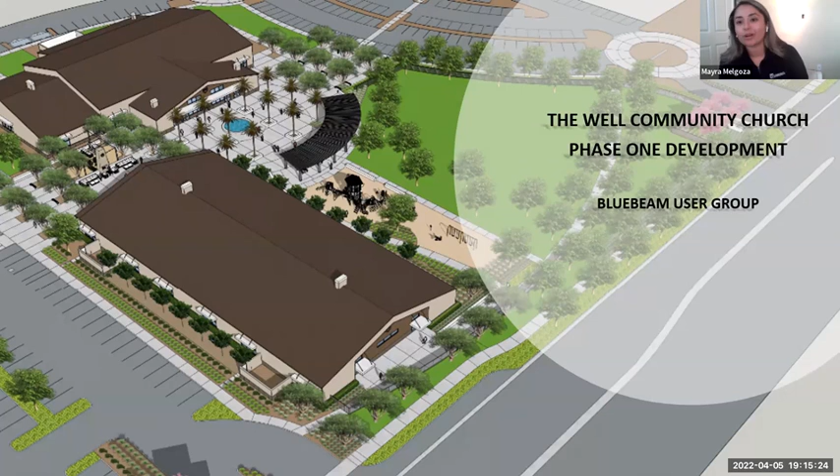So the project I'm currently on as project engineer is the Well Community Church. When I first came onto Quiring, which was probably 2.5, almost 3 years ago, I got hired on as an estimator, and this was actually one of my first projects in pre-construction. I don't know how many of you know what all goes on in pre-construction and how early, and sometimes how long, it can take. But essentially I've been on this job before it broke ground, 1.5 to 2 years, since this was one of my first projects with Quiring at the conceptual stage.

With pre-construction, before any construction drawings get done, you have a schematic conceptual drawing, which consists of usually just one sheet. An architect has an idea, they draw it up on one sheet, and give it to the general contractor to put a full budget together with associated costs. Then as the drawings develop, you have a DD set, design development, what we call 50% drawings. You usually have a few architectural drawings included, some civil, some landscape, and usually at that point the landscape architect draws the renderings.

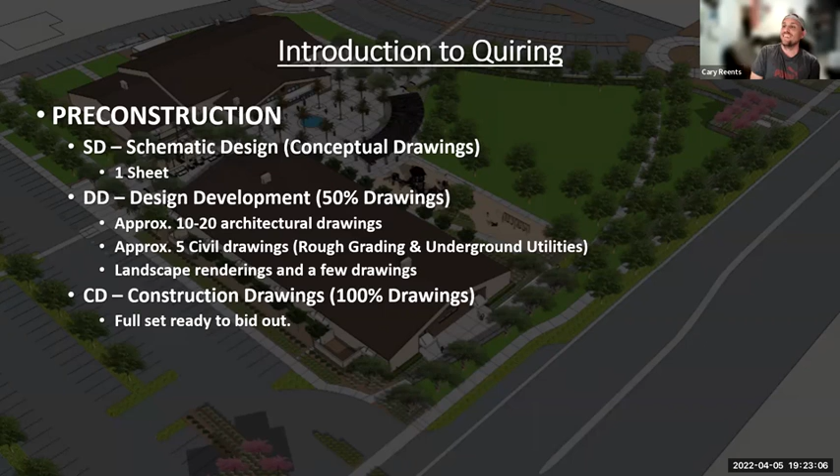Just to give you a brief overview of the project and what it encompasses: this is a 20-acre development of this 50-acre lot. It's off of Clovis and Nees, so if you're local you can drive by if you live in that area. It's two metal buildings, the sanctuary and the classrooms, and the site is pretty large and will feature a play field, a monument tower, volleyball courts, a playground area for the little ones, some shade structures, a fireplace, and fire pits. So this is just a brief overview of the project scope.

And the overlay that you're seeing on the PowerPoint was actually created in Bluebeam. That's probably one of my favorite tools in Bluebeam, the overlay feature. It helps the client see their project over what's currently existing out there.

Mayra, just generally, how did you do that? Did you take a Google Maps sheet and then overlay on top of that?

So what I did was go on Google Earth and get a general area of where your project's going to sit. You take a picture of that Google Earth image and insert it in Bluebeam, then overlay your plan on top. At the end, I was hoping to do a quick demonstration of the overlay feature, not with a photo, but overlaying two plans on top of each other, so students who don't know how to use that feature yet can learn something new today.

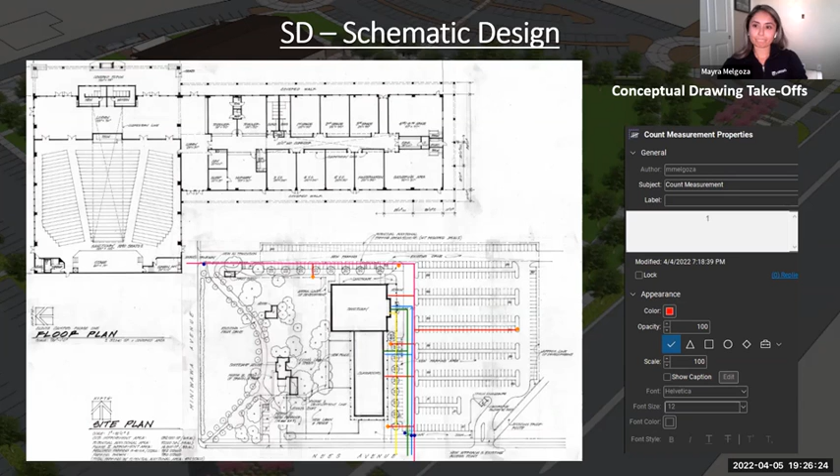And then we get to design development drawings. I noted at the bottom how many sheets are included, and you only have roughly 18 sheets to work off of and develop your estimates from. You have to assume a lot and have coordination meetings with the architects to make sure your assumptions and what you're putting into the estimate are accurate.

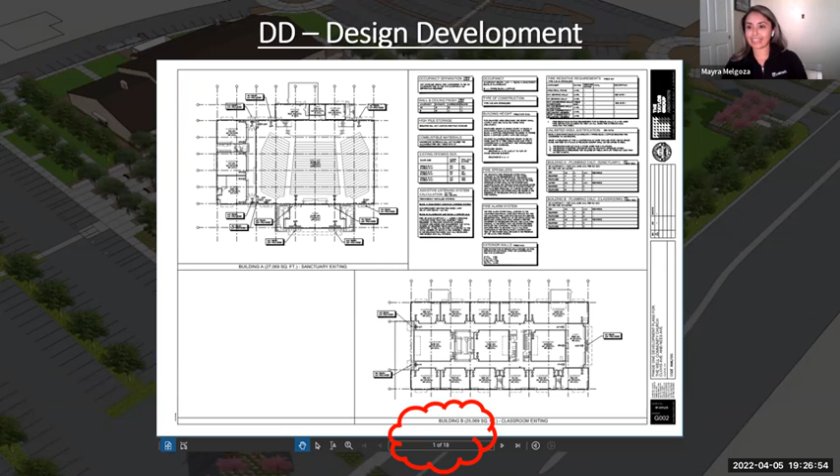Then we have the full set of construction drawings, which is 270 pages, and this would be the set you actually go out to bid with and get subcontractors to provide numbers, the set that goes in for permitting, and that the project team will bid out.

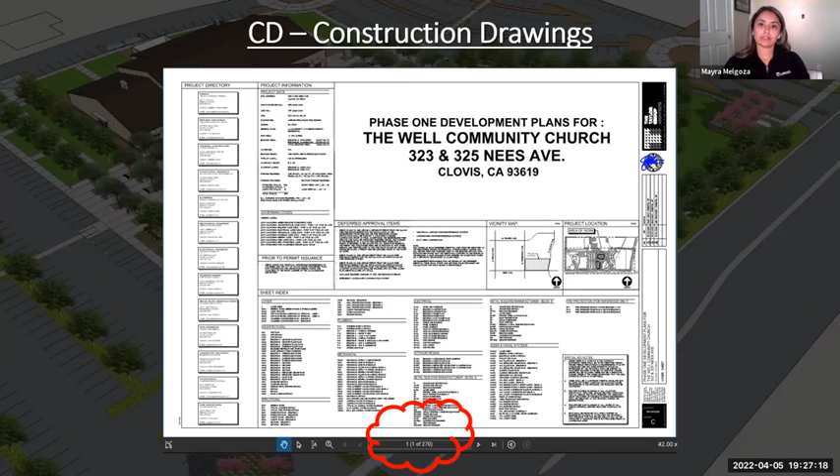I've included some takeoff examples here, both on the site and how I use Bluebeam to develop estimates, doing quick linear footage takeoff of pipe and then plugging it into our estimating software where you input the quantities and associate a unit cost. Same thing with the walls, you can do the interior and exterior framing and associate them with different heights, then plug your takeoff into the estimating software to get the information.

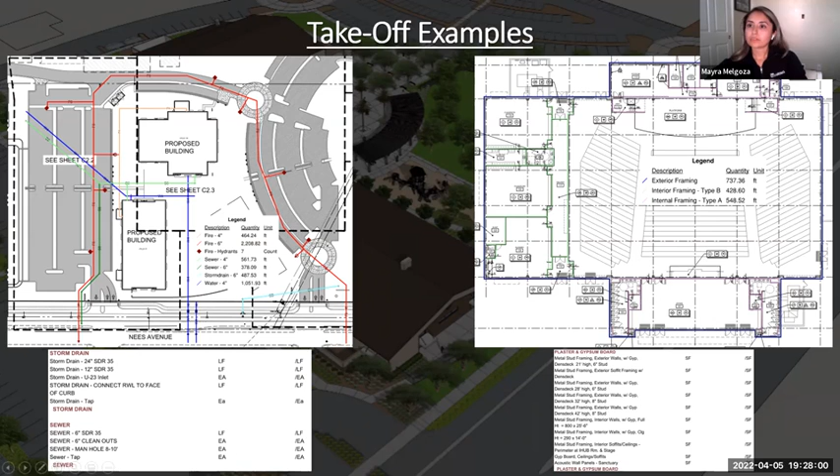As a project engineer, now that I'm out in the field, one of the biggest things I use Bluebeam for is coordination, and this includes drawing overlays. When you're coordinating out in the field, you have multiple trades working in one area and you want to ensure there are no conflicts before you actually go and build that portion of work.

So in this example, I have the civil site utility plan, and on top of that, the building HVAC, building fire sprinkler, and the PG&E drawings. You can see in this mechanical yard kind of where everything is landing, and this allowed us to see there was a conflict down here where our fire riser was right in the middle of an HVAC duct.

It was nice getting this coordinated at the beginning before anything was out and crews were on site, because it saves time on the schedule. These are things that can sometimes get missed during design coordination and pre-con, but if you have these tools and the construction set, doing these quick overlays helps immensely in the field to prevent schedule delays or frustrated subcontractors who have conflicts with another subcontractor's work.

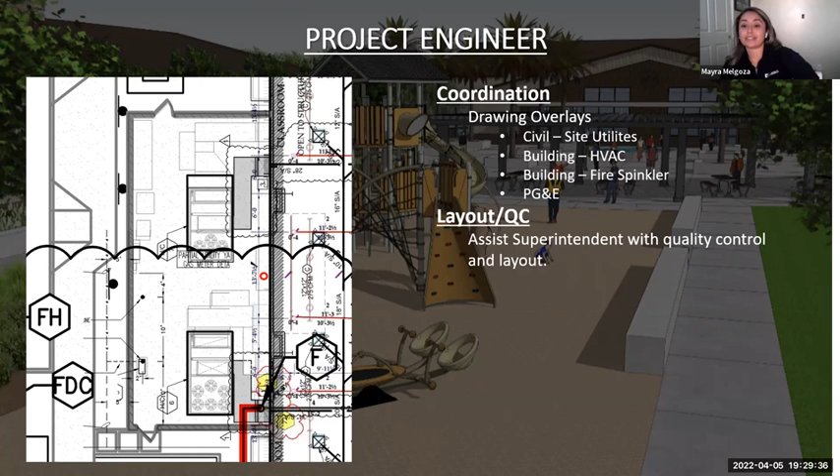One of the other things I do a lot as a project engineer is assist the superintendent with control and layout, using Bluebeam to take layout measurements and go out in the field to verify some of those distances.

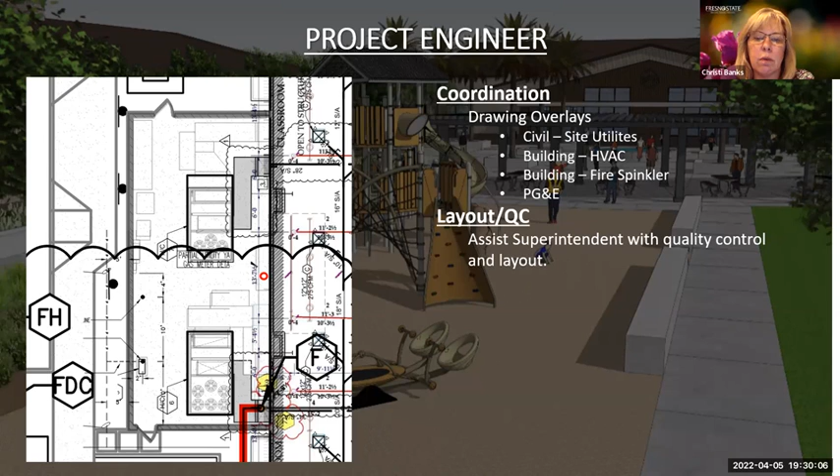So Mayra, I have a question regarding the coordination of your underground utilities, and maybe Cary, you can pop in too. On this job, how close was what was planned to what was actually there? Did you guys go out and do a USA request and find differing conditions, or was it pretty true?

So one of the things about this job is that it was old farmland, so there weren't many existing utilities, and all the existing utilities we found were minimal irrigation pipes. But we did do USA along the borders and the frontage of the roads where our utilities would tie into the city.

Yeah, that's pretty common. Most of these new construction sites, when we do USA, you'll just get the outside and it might have a couple tick lines. If there's any markers, that'll tell you where it's going on the site, but they don't go too far. A lot of times if we know something's going in, we have our trades do potholing, and they'll do it every so often to figure out how far a line goes. But there's always something buried everywhere.

I'm sure Mayra found plenty of surprises on this site. I found VW bugs buried in the dirt in some places. No way. Yeah, so you never know what you're gonna find.

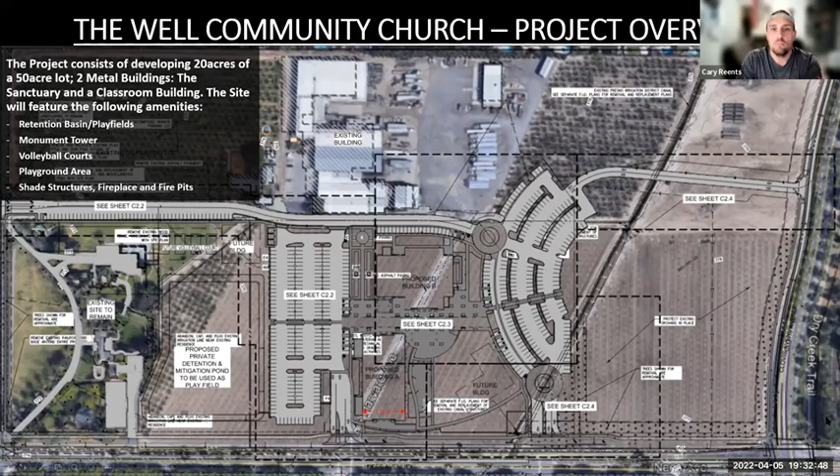For two reasons. One is for temperature control, and the other is for how long it actually takes to pour that amount of concrete and finish it throughout the day. This subcontractor actually had two different crews—their morning pour crew, and then the finishers and saw cut machines came in after the fact.

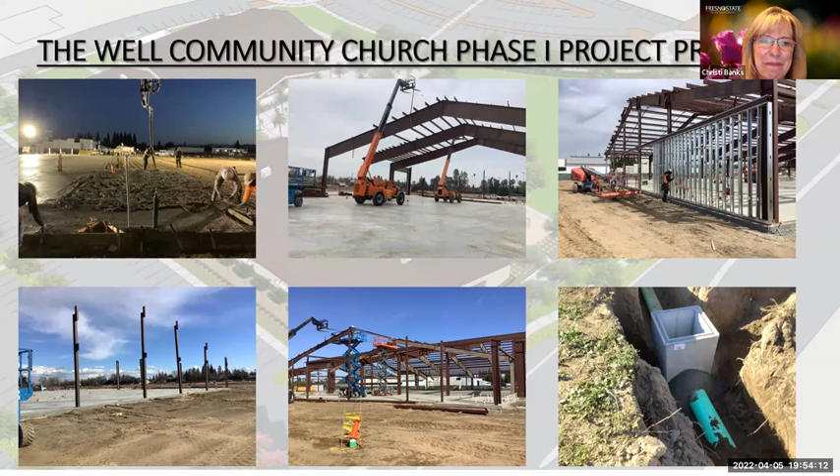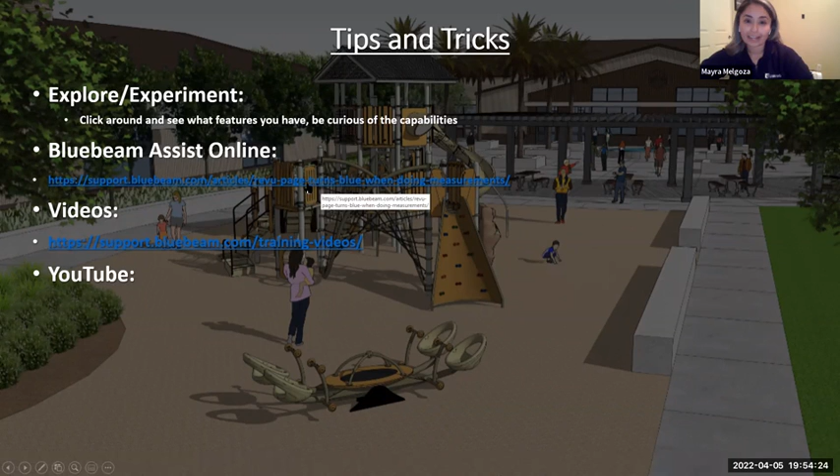It's kind of perfect timing, because this goes towards the tail end of the project, where I just add some links. These two links are probably my go-to. This one I actually used the other day - one of the architects sent me something as a PDF, and I kept getting these weird blue screens coming up, and I wasn't able to get my measurements right when trying to do takeoff. All I did was search why page turns blue and take measurements, and it gave me a complete solution. I just implemented it and went on with my day. It was helpful, but it's about using the resources out there and being curious about all the things Bluebeam can actually do. There are so many videos Bluebeam themselves have, and you just have to have the curiosity to dive into what the capabilities are.

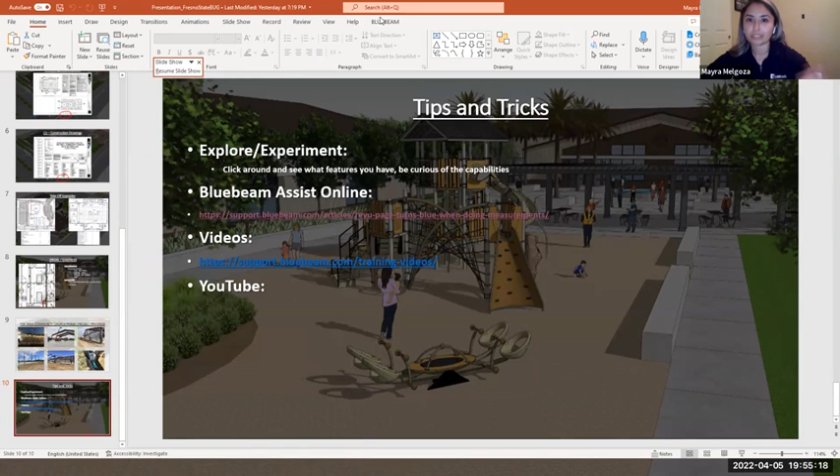And right now I'm going to stop the share because I'm going to switch over to my Bluebeam and show you.

Hey Mayra, I was going to stop you before - what do we know about the videos on Bluebeam? But what was the Bluebeam Assist? Was it just questions that you type in?

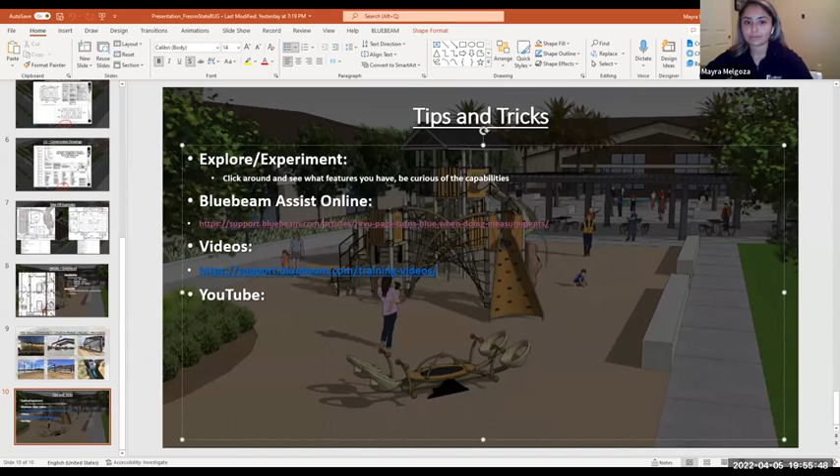Yeah, Bluebeam Assist online - you click on there, it's like technical support, so you just search what your problem is, and it gives you articles relating to your problem. They literally show the problem, the cause, and the solution. Super straightforward - you can type in any problem on this technical support assist thing, and they'll usually have a solution for you. And if not, I just type it into Google, and usually the first link that comes up is the Bluebeam support.

And I think that's just on www.bluebeam.com, right? So I'm going to put that in - if you go to the Bluebeam website, you can actually find all these training videos. So those of you in CM20 now learning about Bluebeam, you can go to the Bluebeam website, and there are training videos, webinars, all sorts of things. And it looks like, from what Mayra is saying, there's a Bluebeam Assist where you can type in your question like she did, like why pages in Revu turn blue, and she was able to find the answer. I'm assuming that's how you got there.

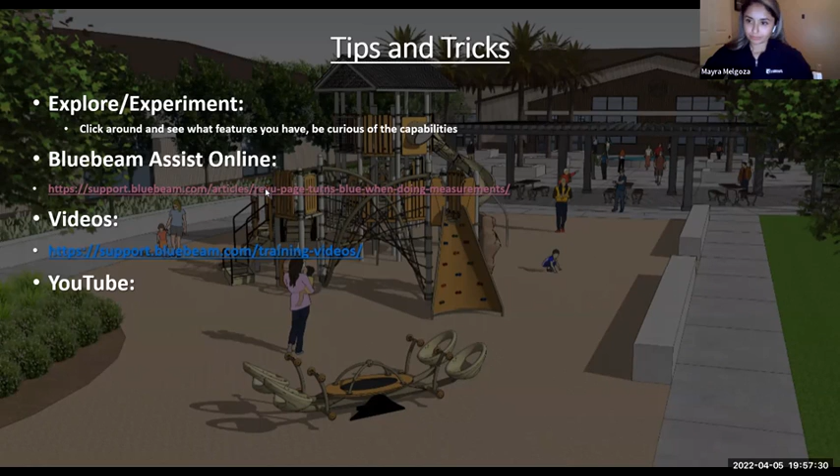Yeah, it's just support.bluebeam.com. Oh, so it's support - no, it's their technical support, support.bluebeam.com. Yeah, so for those of you starting out, I know Tomas and some of you in CM20, that could be very helpful for you.

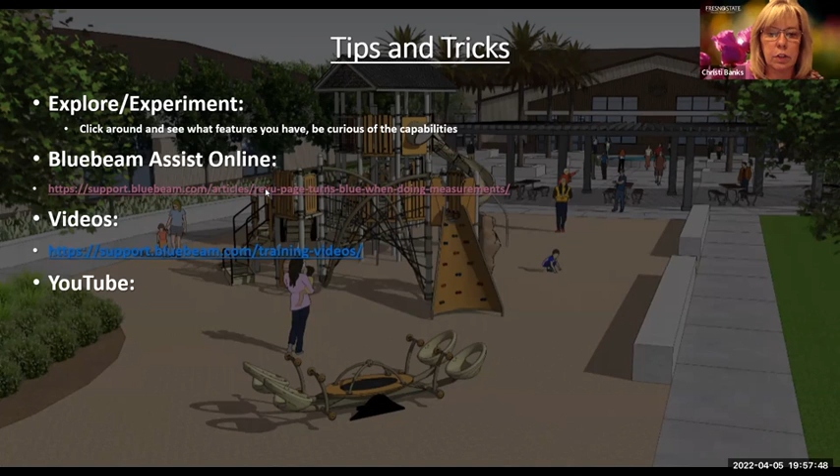While Mayra is pulling up her screen, I noticed there were a lot of new attendees. We have a graduate program now for a Master of Science in Construction Management, and we have a whole class that likes to come to these, but it's at the same time as the Bluebeam meeting. I think they got out early and saw a lot of them pop in, so we doubled our attendance here. They all came from the graduate class. So it's so nice to see all of you guys.

Yes, our lecturer Vivian let us out early. I saw you come in and thought she must have let you out early. It's good to see all of you. What class do you have, Nanad? It's CM 240, Advanced Construction Business Strategy.

Okay, so it is showing here now, Mayra. I want to go through what I do out in the field, quick overlays, to help coordinate any of the drawings or see any conflicts down the road.

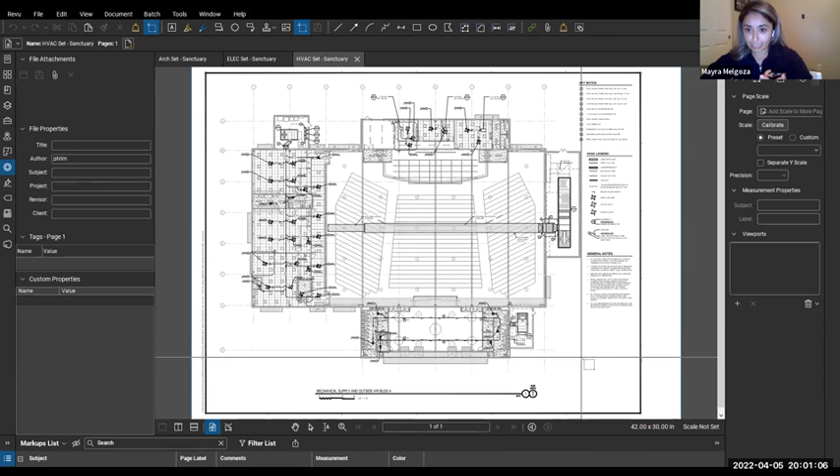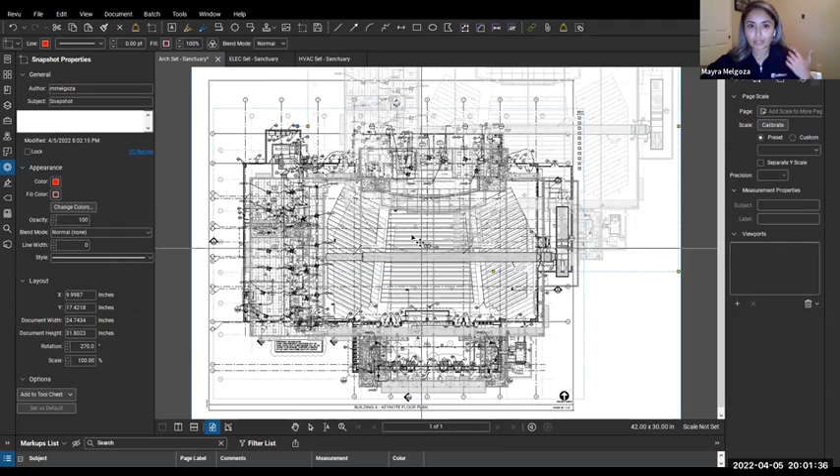So you see that turned blue, that means it captured that picture. Go off to the architectural set and just paste it. Then you come in here and line it up. Since it's to scale, lining up is fairly easy to do.

What I like to do once I did that snapshot on top of the other one is come out here to the blend mode feature under properties and settings. There are all these different options you can do. Once you put an image on top of another PDF, I just do multiply, and it cleans up and makes the mechanical drawings a little bolder. So you can quickly see the difference between normal, which fades out some things, versus multiply which makes certain things stand out more.

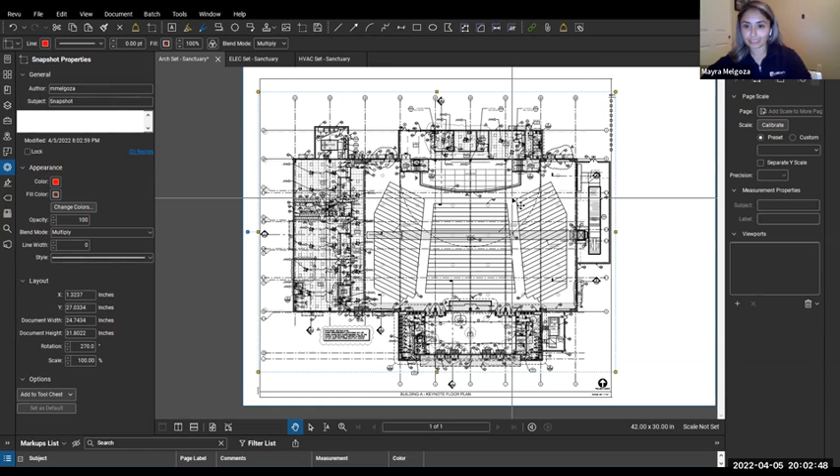Here you can see where the large duct is coming in, going over the sanctuary. The other things you can do is see how it lines up with electrical lighting, your ACT tiles, where your ducts are coming in. This is just one quick, easy overlay feature that is probably one of the most used out in the field on my side for any coordination items, along with the measurement takeoffs that I usually keep on this side.

And then if I want to draw on it and ensure the image doesn't accidentally move, I just flatten the picture. Now I have a PDF of the architectural plan and the HVAC plan on top of it, and I can mark it up without any concerns of it moving or going offset.

Anyone have any questions or anything they'd like to see? Mayra, I have a question.

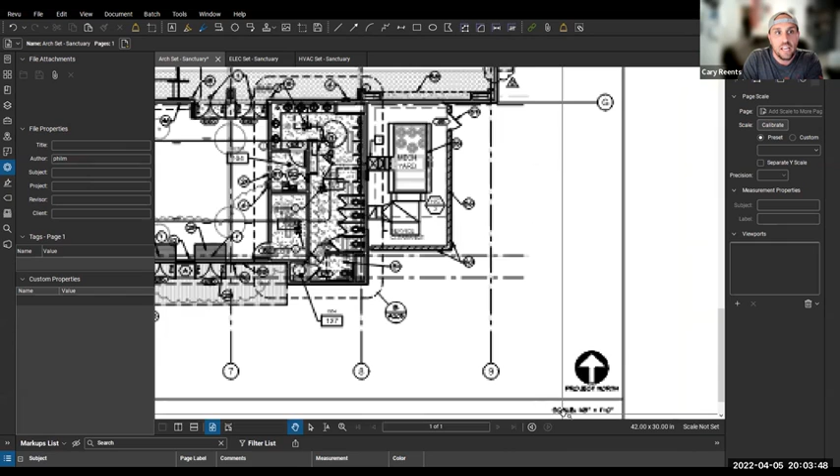That's awesome, I didn't know about the bolding, but this really works well if your mechanical and your architectural in this example are set at the same scale, everything too, right? So if they're different scales, it wouldn't probably line up correctly. Is that correct?

Correct, it wouldn't line up correctly. But the good thing about having it be an image instead of a straight document overlay, like an 8.5 on top of an 8.5, is that with the image you have this scale feature under snapshot properties, where you're also messing with the blend mode, and you can adjust the scale.

This usually works out when you want to overlay building internals on top of the site plan, because the site plan is usually a completely different scale, and all they usually show is the perimeter of the building. They don't show where the bathrooms are laid out inside, or any other features. So when you do the building overlay, you usually have to shrink that one down and scale it smaller so it fits properly on the site plan.

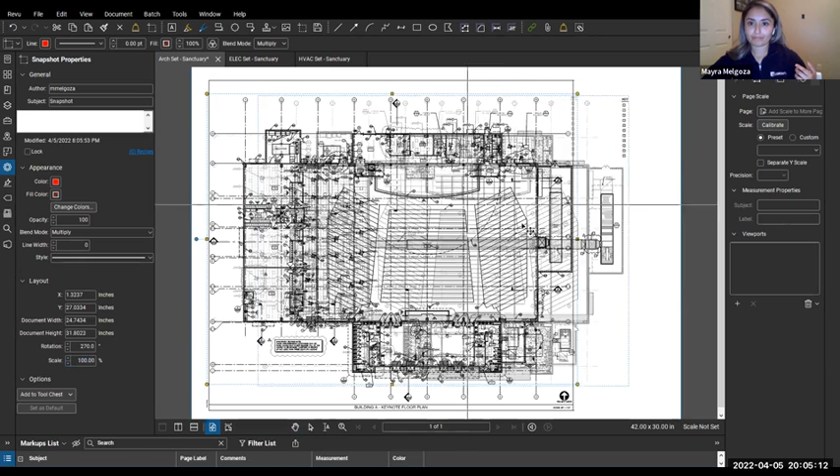Good to know. And the same thing goes when you're doing a Google Earth image and trying to overlay a PDF on that. I use the same tricks here, but instead of the architectural drawing, it would be the Google Earth image flattened, and then I would bring in the civil drawing and lay it on top.

Yeah, and that one you kind of have to use your existing surroundings to scale it properly, so it takes a little bit of art to it. And you get the product. Okay, got it, cool, thank you.

See, I learn new things in here too all the time. So thanks, Mayra. I'm surprised more professionals don't come, they're probably so busy right now. That's probably what it is. All good.

It's kind of like getting that full picture without having a BIM model, because you usually don't have a BIM model on all projects. Being able to do this in Bluebeam really helps out in the field to see everything happening in one location. Any questions?

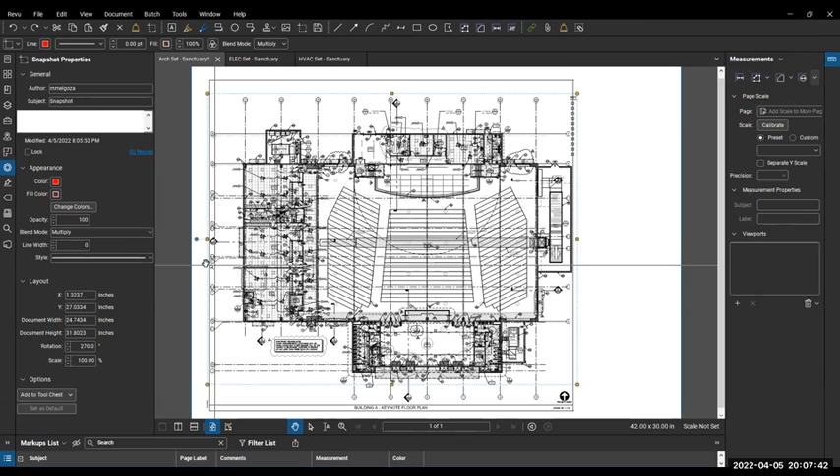It's preference, because you can do that as well. What you can do is change colors here, and you can modify different colors, analyzing it. It gets really messy when you do it with multiple drawings.

Another feature they have here is the overlay blend mode, and I usually don't like that because it doesn't really show you what you want, even though it says it's the overlay blend mode. Not the best tool.

I've noticed my preference is the multiply blend mode. It kind of shows you both and distinguishes which one's which.

If you're doing like, what's the difference between architectural plan at 50% versus architectural plan at 100%, one of the quick tools to do is this difference mode. Because they're completely different documents, I have HVAC on top of architectural, it shows you all these different areas. You can change the colors and that usually helps more.

You do red and I'll show you the red ones. I will show you where some of the differences are, like there. It's showing a lot of differences because, like I said, it's a completely different drawing set.

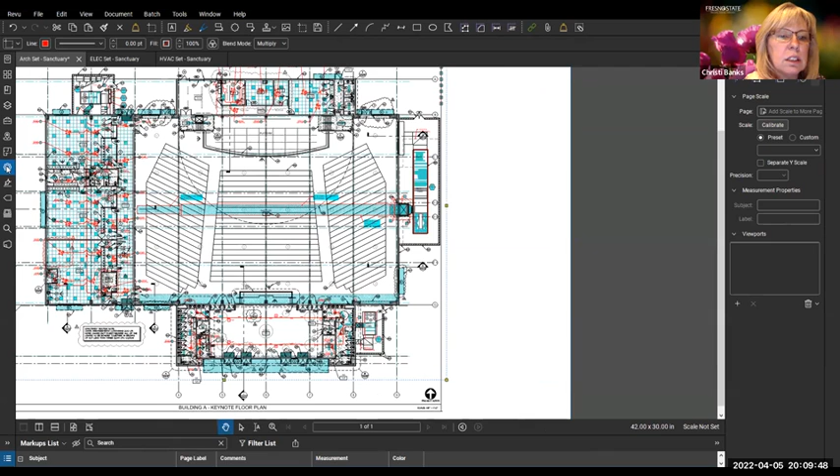Mayra, was it just right clicking and going to color processing? So it's right here under snapshot properties, it's in the settings. So you go and do the change colors, and modify.

Yeah, I didn't see it because I've got the chat over here covering it up, that's why I missed it, I was like how did she get that to show the colors? Yeah, you go into the snapshot properties and you can change the colors.

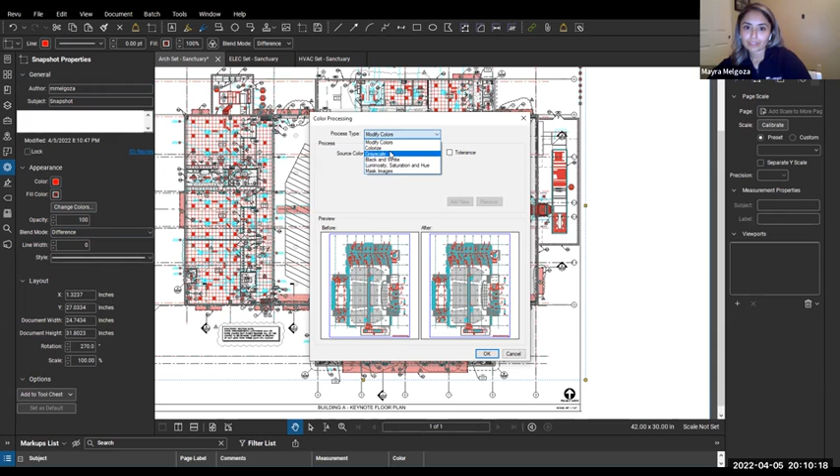You can go back to grayscale. There are various different settings you can play with, and it all comes down to preference on what your eyes like to see best. Some people on their iPhones like dark mode with a black background, other people keep their traditional white mode. There's no one way that fits all. You just have to be curious of Bluebeam's capabilities and play around with it, click around and see what this does, what that does, and how it benefits you in your current situation.

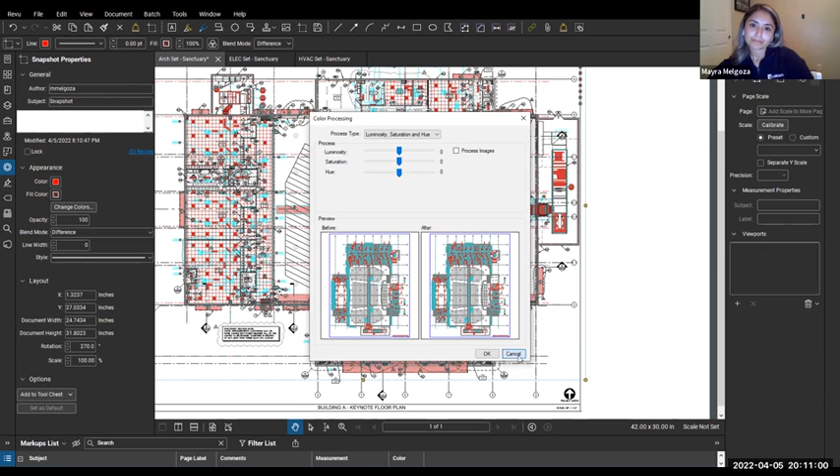Yeah, would I be able to ask a quick question? I don't know if you guys can hear me. Yes, we can hear you.

Okay, so I know how you said that you guys did not have a BIM model for the project. I don't know how realistic this might be, but say in a project like this one where you don't have a BIM model, is it realistic to possibly develop a generic model using Revit before construction begins to try to figure out all of this coordination stuff? Not going into a super large amount of detail, but more so comparing the different sizes and components of the building and the different systems. Do you know if that's something that might be of value in a project or not?

Yeah, no, definitely. It's all a matter of the client and what the client is like. Some clients see the value in BIM and 3D modeling and can afford that kind of service. Other clients are trying to build to a budget. For instance, in this situation, it's a church, so they usually want to value engineer it and get the most bang for the buck if they can, because they're limited to the amount of funds they can raise with their congregation. You usually don't have the opportunity to pay for those services like the modeling and Revit. I suppose my question is who's going to do it and where that cost is going to go.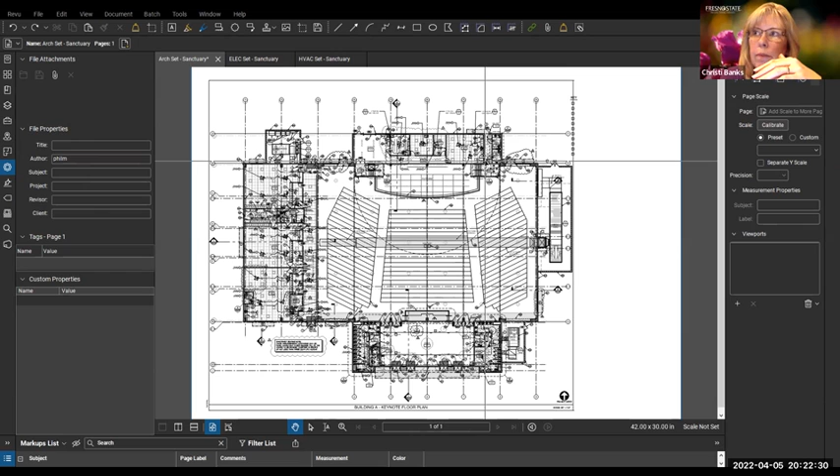I'm curious, one of the reasons I asked this question is I've helped some companies build, because I'm Catholic, a number of Catholic churches, and the way Catholic churches do it sometimes is they have capital campaigns to start the process, but they don't have the full amount to finish it. So it's a constant funding thing with these clients to try and keep the construction going. A lot of times with these private clients, they want to show their community that they're starting this building, so the focus is on getting it going so people will put more money into the campaign. I don't know if that's the case with this, but it's a very interesting process behind the scenes, very different from other commercial work. So I don't know if you guys experience that or not.

I don't know about this one. There's a risk to that methodology too, because take COVID as a great example. You have enough to start, and then if you're not into framing and they say we need a fundraise for framing, and lumber just goes through the roof, you're now in a position where you're going to pay more on your lumber than you were thinking originally, which means you have to fundraise longer and stuff like that too. I haven't come across that scenario personally.

That's good that they gave you the money right up front, because I've seen it the other way and it's like, oh my gosh, how crazy is that. It could be they go in for certain loans, and they have to be able to show that they have an influx of so much cash coming in from donations that's guaranteed, in order to get a loan funded for the balance up front to pay back, or a market study on the needs and stuff like that.

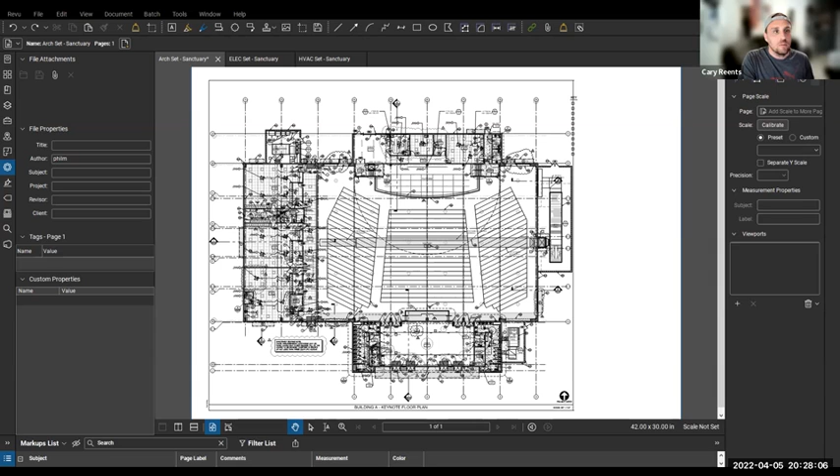What's interesting, Cary, is that in our CM20 class we talk about these project delivery methods a lot. Some of the students, like Tomas, are in my CM20 class. You look at Caltrans jobs and they're low bid, and the way the system works a lot of times is those contractors will low bid the job and then change order it to death to make more money, or they'll be bad contractors and end up going beyond their liquidated damages and try to negotiate something down the road. These public companies are probably seeing good quality contractors like Quiring come in and finish on time, and they're seeing the value in that, because a lot of these low bid jobs have a lot of claims. Any public job that's low bid is going to have a lot of claims, where you guys are so client focused. When you're doing jobs like Valley Children's or like this at the Well Church, you're getting it because of your reputation. That's probably one of the higher qualifications, is the reputation and your customer service to be able to handle that kind of job. Not every contractor is able to do that.

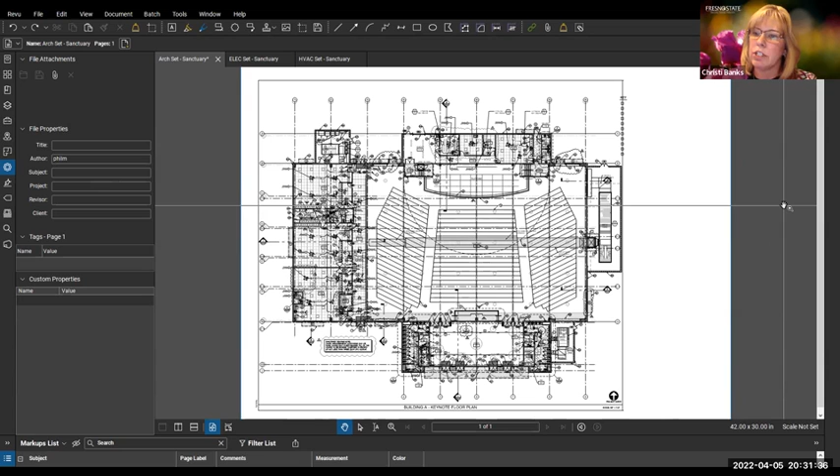Yes, there is. Let's see if I can. So here, when you go into search, this little magnifying glass, you can do a visual search. So you can do a get rectangle, and I want it to show me where all note 60s are located. Since this is just one sheet, it's probably only going to have a few of them. Then you hit search. But let's say you have a drawing set with like 270 sheets, and you want to go through and see where all of this specific one is located at.

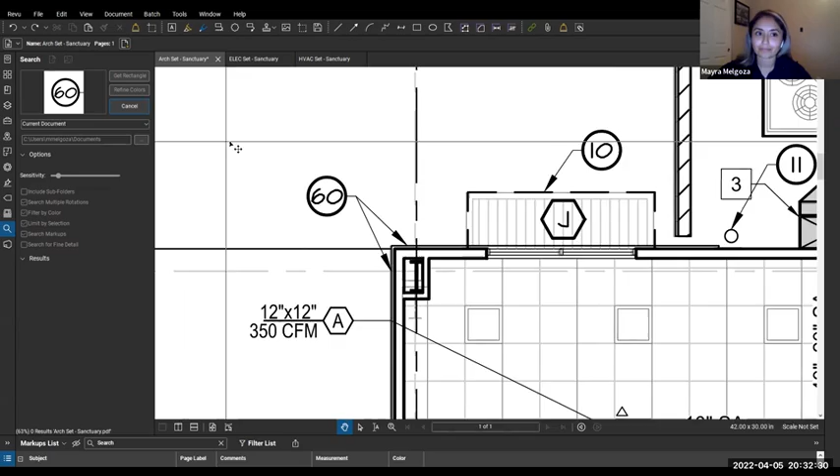It won't do a count for you, but it will help you find where all the items are at. And that might be the only note 60. Oh no, there's another one over here.

Did you get to the visual search? Let's see again, how well. Oh, let me see, I didn't flatten my other overlay. Let me flatten that.

There we go. So traditionally, I usually have mine all kind of set up, with all my tools over here on the left-hand side. But if you don't have it set up, you can either hit Control F and it'll pop up automatically, that's the keyboard shortcut. Otherwise you'd go under... I don't know where it's actually hidden in here. Oh, there it is, help, find tools and commands. Yeah, when in doubt, Control F and it'll pop up.

Another thing too is when you go under view, there is... I'm having trouble finding it right now. So here's the other overlay pages that I was talking about earlier, just a quick side note if you want to do page on top of a page, as opposed to what I showed you guys earlier.

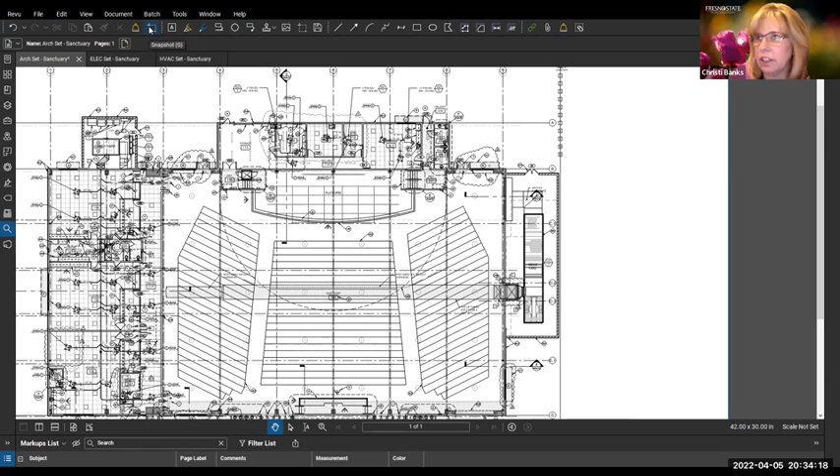There we go. While she's looking for this, Matt, that snapshot feature she's got on, that right there, it's easy. It's almost like selecting, so you can select it when she was searching in the search bar, just select the door number and it'll show up on all the sheets. Okay yeah. But this one, right here, you can search text, like your normal find, like column or frame or something, and you'll search the text. But if you wanted to search something visually, you have to go into this visual option and click the rectangle.

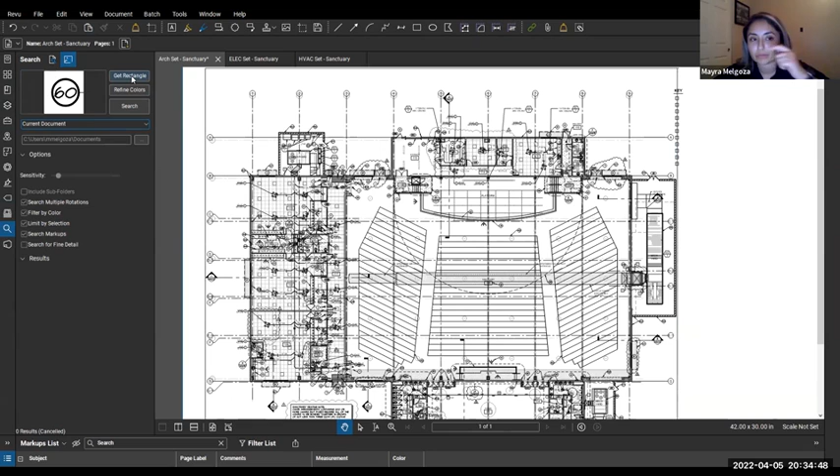But to do a quick door count, what I do is you go over here under tools and you go to measure, and you have all these options. You go down here to count.

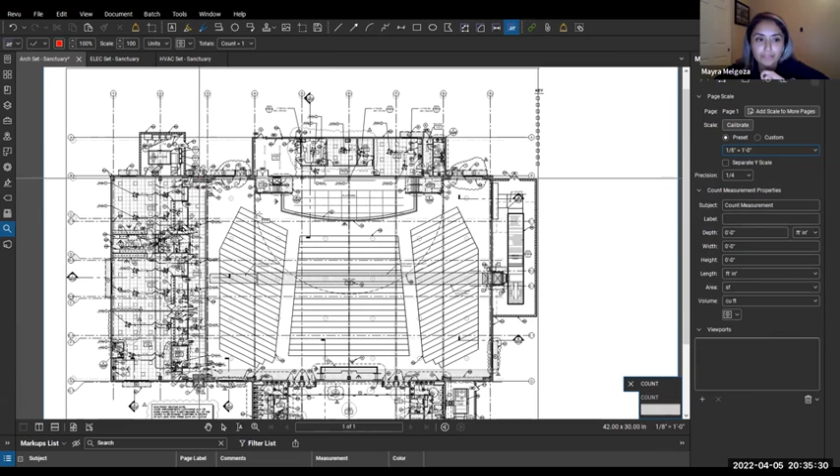Over here on my measurement tab, where I have it on my right-hand side, if you're doing multiple takeoffs, you should set the scale right away, because once you start, it can get all messy. You also have counts in here, so there's multiple ways to get to this count feature. The standard is this check mark, but under settings and properties, you can change it to give you different icons, so you can do a triangle and then change the colors. So I normally like to do this.

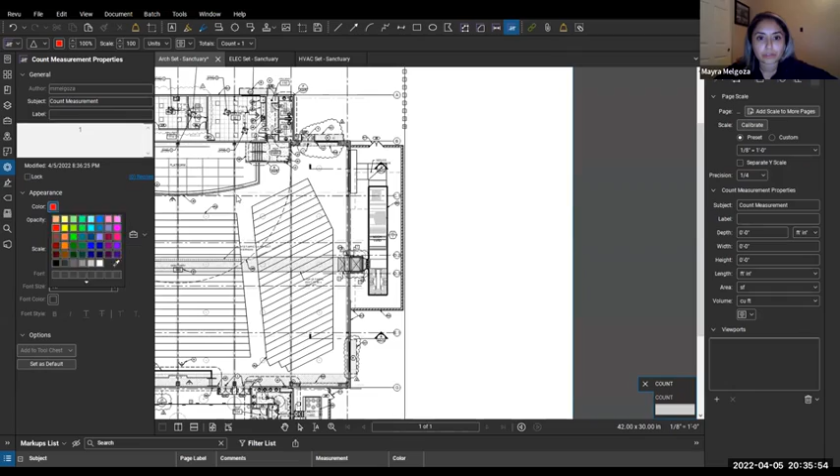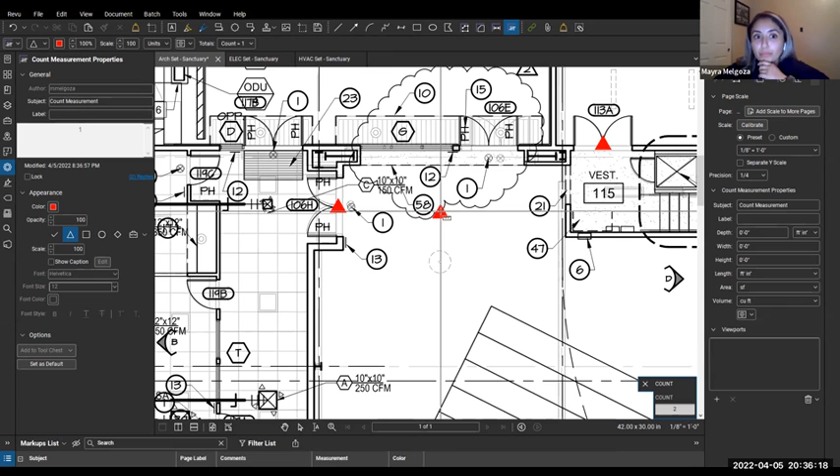Let's see if we do a quick one. So like double doors, I'll do red triangles on all my double doors. And then like if I have the 113As, they're all interior double doors, and if I want to distinguish them, like that's another interior double door. If I want to distinguish between interior and exterior, I'll do the count again with triangles, and then I'll just change the color to green, and then I'll have 2 here.

So one thing that's kind of nifty is down here where the page count is, if you scroll down here you have this blue highlight section. If you click that, it gives you your markups. So here you can go and label stuff, and you can say, okay, these are interior double doors.

Where did you put the label? Just down in the mark? So the label is down in the subject area over your markup property.

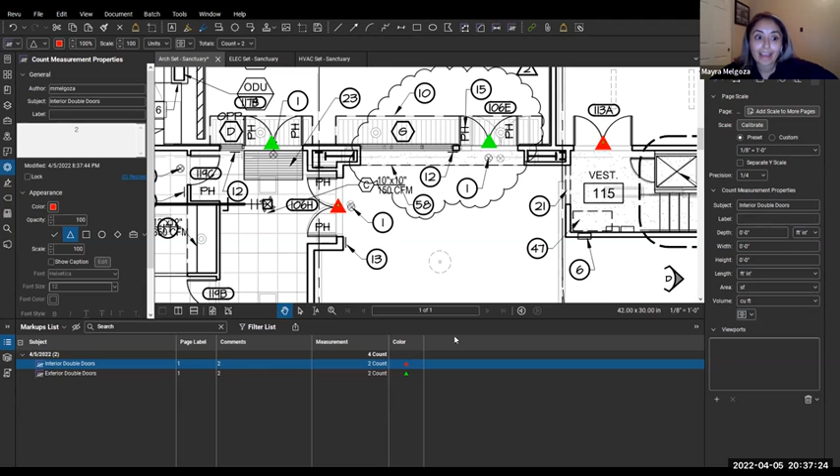You just highlight everything. Let's say I also want to do the single doors, so I'll do a count, and I want single doors to be squares, and they'll be red because they're interior. They're just a different shape.

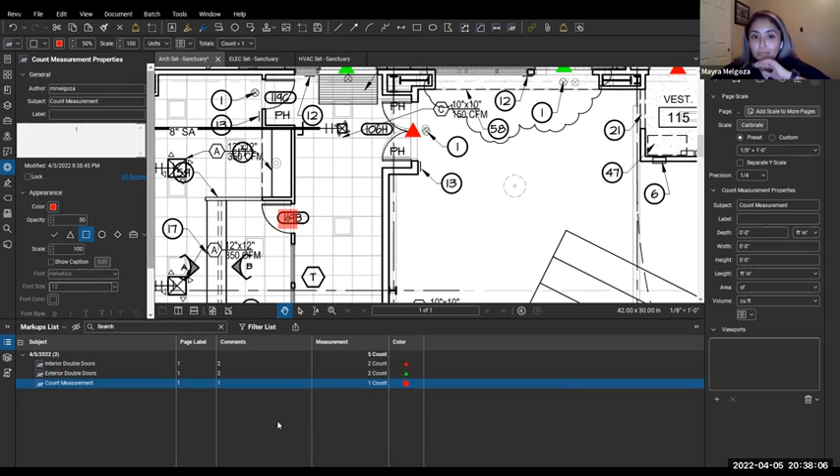What you can also do is change the opacity of your marking. If we change it to 50, that way it doesn't necessarily block off everything or hide anything behind it. You can still see the 119B, but it's still counting that square.

So you do the same thing, and then once you get all your doors taken off, you go in here at the bottom and you can create a legend, and it'll just summarize. What does it do?

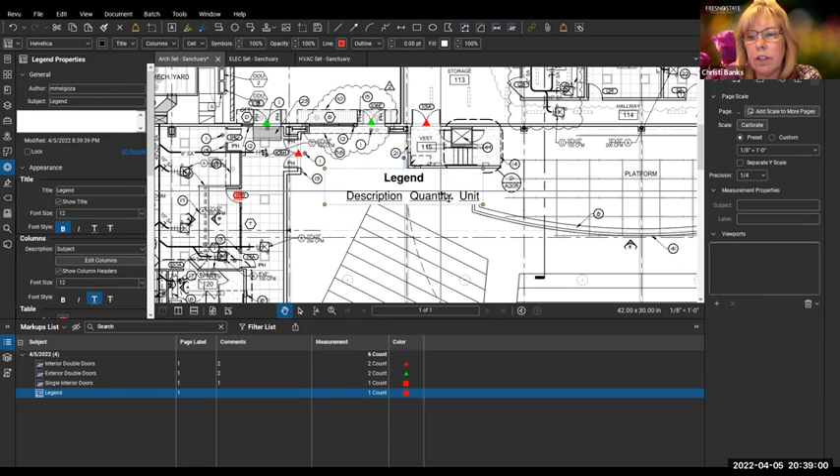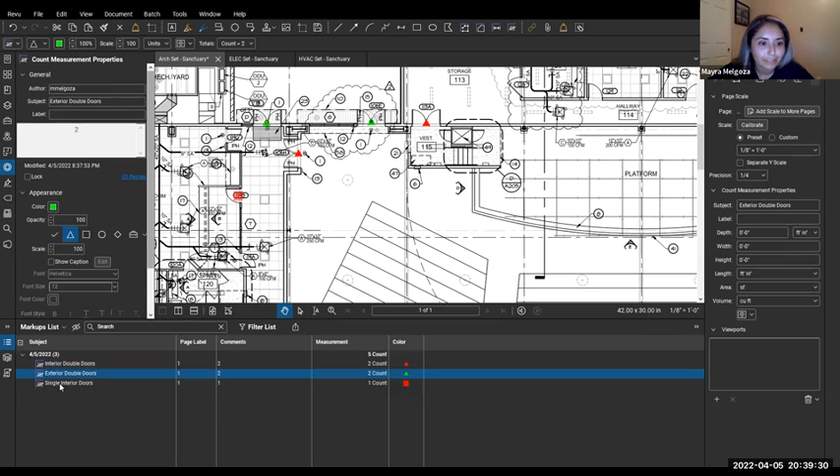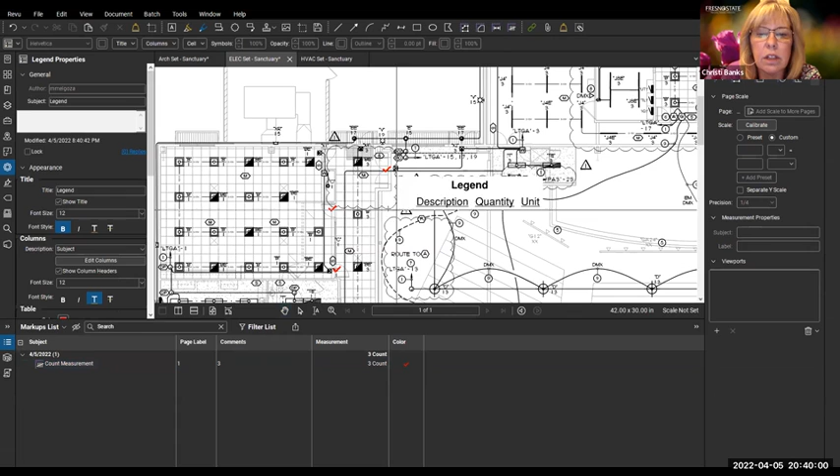I think my Bluebeam is kind of acting up right now because of the overlay for some reason. It's not wanting to give me a legend - it's like it's not calculating your markups down there. It's not calculating any of my legends right now. That's not good.

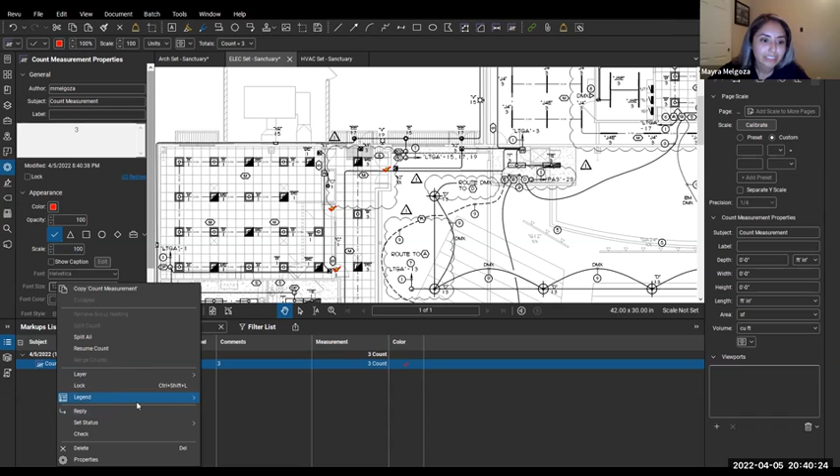This is where I would go and type into Bluebeam technical support. I think you just have to edit the columns. On my legend? Yeah, if you create new legend and scroll up on the left, it should say somewhere like edit columns. Right there, edit columns. I think you probably don't have the count selected. There it is, see? Or the measurement - I think it still didn't calculate it.

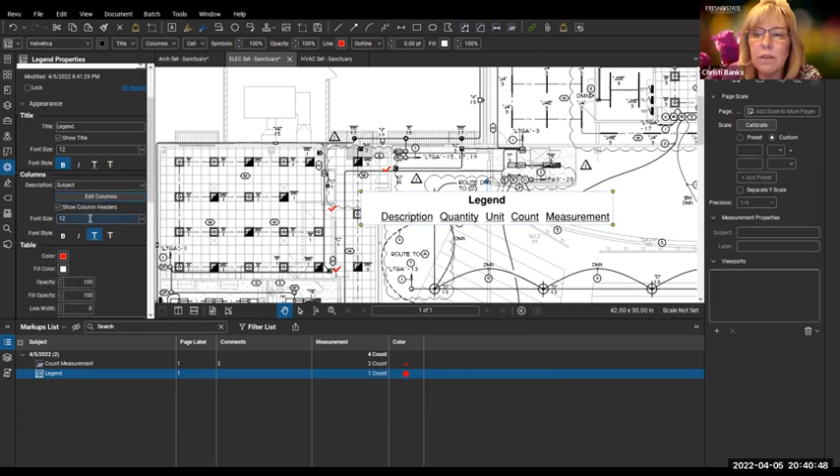It'll probably be the measurement. Oh no, that's weird. You don't need to just pull it down, Mayra. You see where the little dots are? No, it's just not showing, huh? It's not showing it right now. Yeah, bummer, let's see.

Let me do something quickly. So Matt and Kiet, I think that will really help us. We're doing this hotel project, and they've got all these queen size rooms that are all the same size, and then they have a few accessible rooms, but everything is the same because it's a hotel. So we just need to go in there, and this will be very helpful being able to count.

Professor Banks - so like for doors, the symbol changes, right? Like by door type, it's not always the same on the plans. But for windows, it is, right? By window type, it's usually the same, like if it's window type G. I don't know, I think it depends.

Maybe Cary and Mayra, what you guys have seen - I think it just depends on the plans. Usually, a lot of times when you have different window types, they'll be designated, like a nail-on flange fiberglass Milgard window versus a storefront window. A lot of times it'll be the same symbol, but inside it might be designated G, and a storefront might be GG - a different designation of that type. Usually they're the same call out unless it's a specialty item, but every architect does things a little bit differently, so they might decide to designate between the two differently.

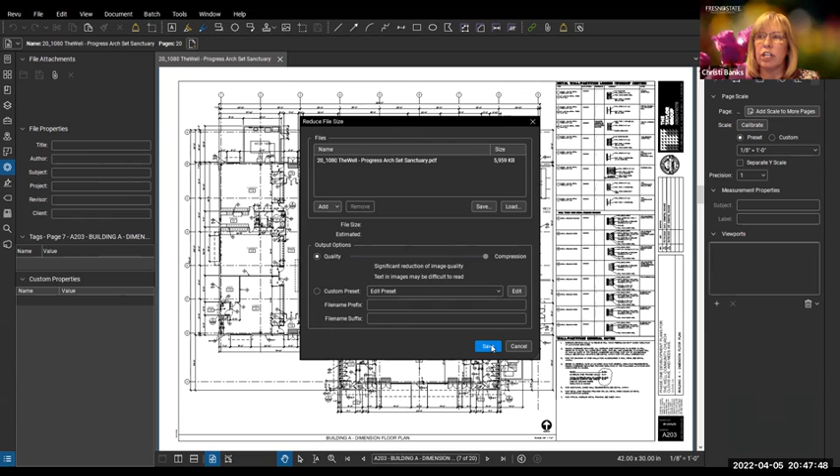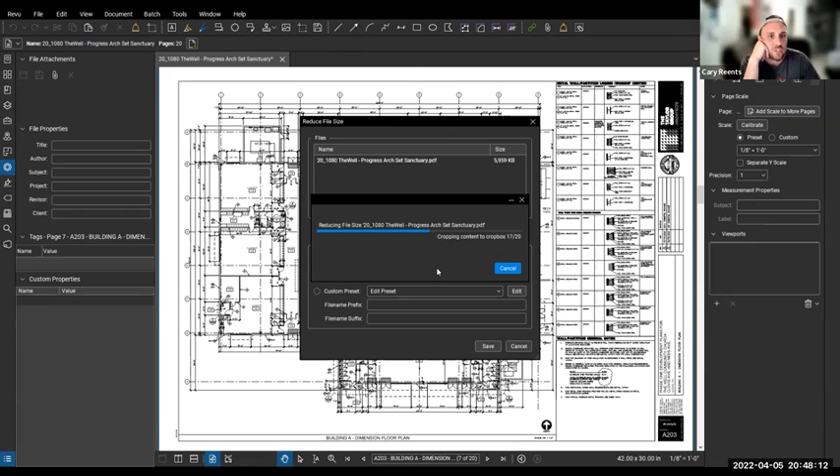You don't have to put it in like a zip file. Yeah, I see, it will. So like say you have a JPEG file that's really big, you could actually reduce it down like a picture file. Yes, so it'll reduce the existing file, it works when you have a lot of content on a set or a drawing or a sheet like that, but it won't always bring it down to say 1,000 kilobytes or something like that. It'll help, but it won't always take it all the way down.

Yeah, and then it tells you, like this one only brought it down 1.22% because it didn't have a lot. But like Cary said, on some of the ones that have large images, it does significantly bring the file size down.

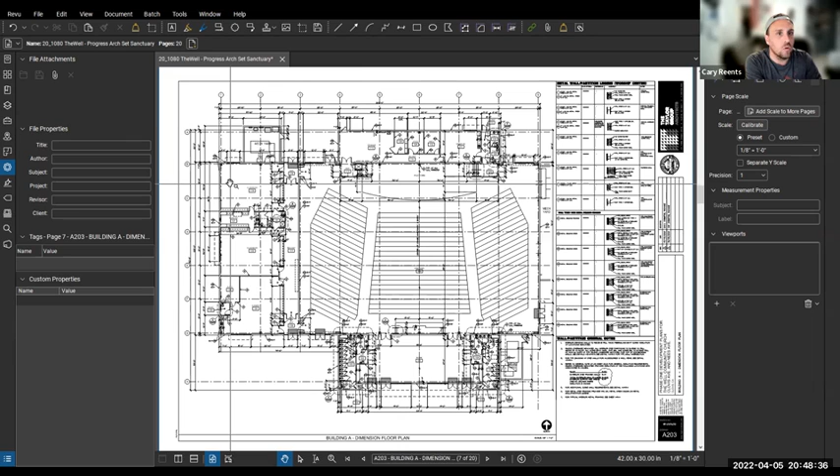The shortcut for the OCR is Control-Shift-O, so hold all three of those down, that should take you straight to it, or at least that's what it is on this end. Control-Shift-O, did you try it? Try it, Mayra, see if it works. Control-Shift-O. I am.

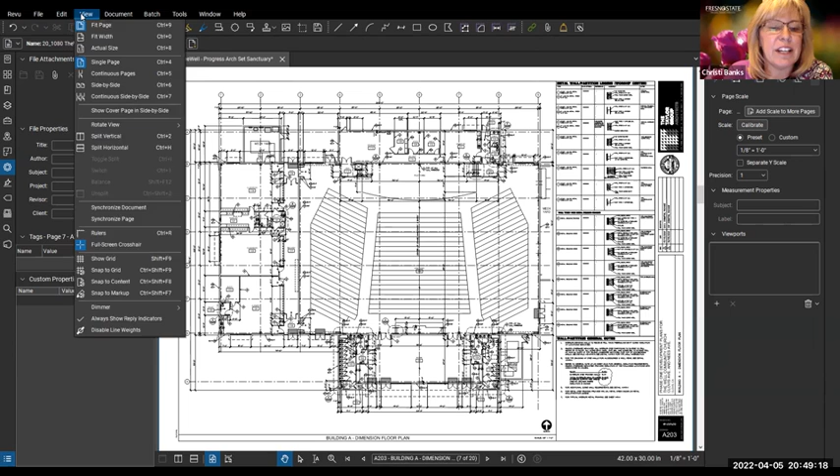Yeah, for some reason I thought it was in tools, but I could be wrong. In mine, it's in batch and document. I can find it in two, but it doesn't seem like it's there. Oh yeah, so it's Shift-Alt-O.

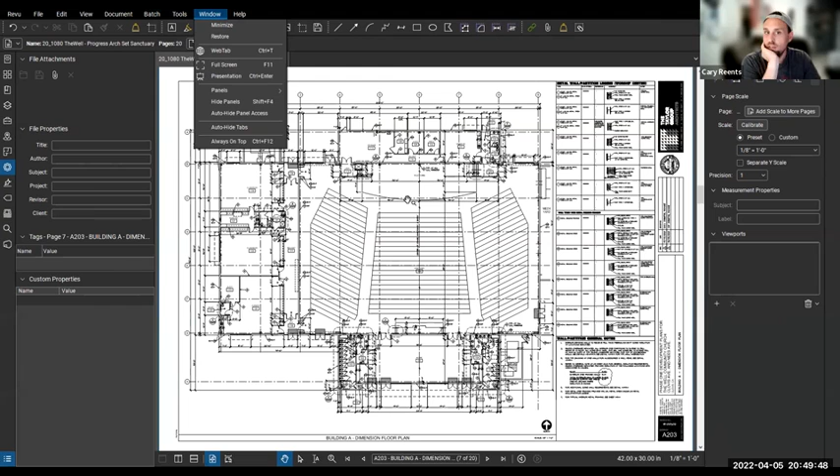Okay, well those of you that can find it, that's what you do. Interesting, I wonder if that help feature has a search? Find tools.

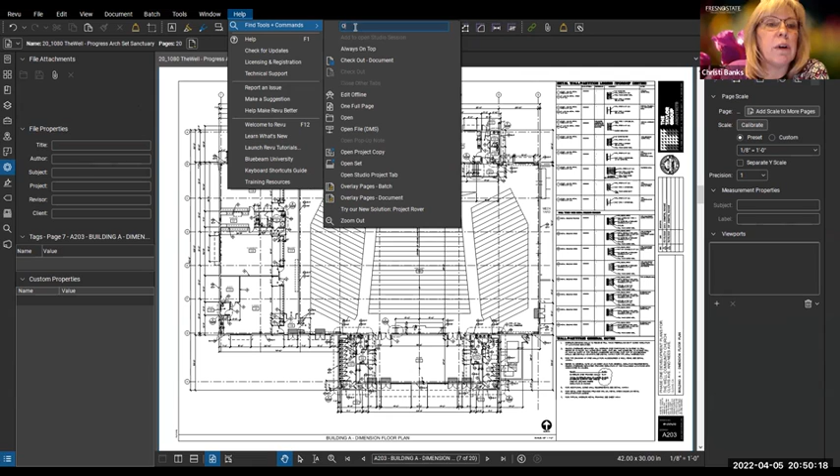Maybe they did get rid of it. Yes, because they open up like other... yeah, they don't have any more. Interesting, I wonder why. We'll have to maybe, Ninad, do a little research on that and get back to you on the answer.

I know I'm getting this new version too that I've got to upload, because I think I get a full license, so it's nice.

Okay you guys, any other questions for Mayra or Carrie? Yeah, I had one, go ahead. Yeah, so Mayra mentioned something about loading some pictures into Bluebeam. I don't know how to do that. Maybe you can show me how to do it, Mayra.

Yeah, let's see if I have a good picture to load in there. Do they still have the picture feature, or did they get rid of that too? I know, they're just getting rid of everything. These companies, especially big companies, like to switch the software around, you know, really mess with your mind.

I don't have many pictures right here. Let me do this real quick. I'll pull up Google Earth and I'll just create a new picture.

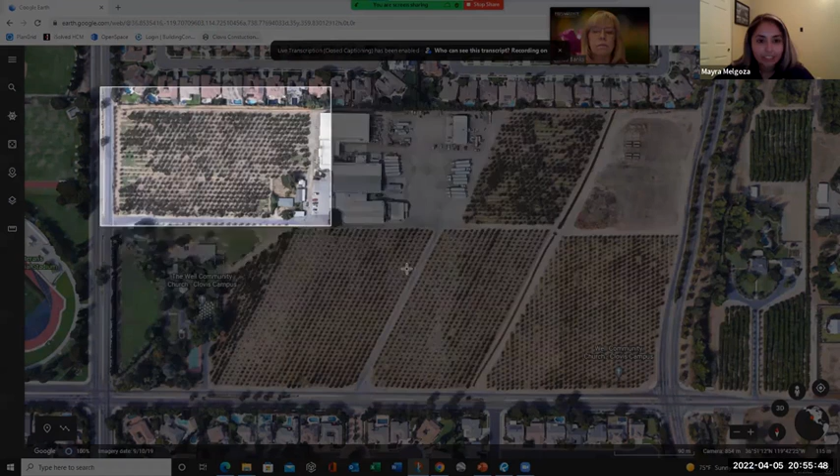So right there, I usually just do the screen capture down here at the bottom. I pin it to my taskbar, but over here you can do the snip and sketch. Grab that, new, and you kind of just highlight the area you want. You want to have some reference points like the streets and the intersections.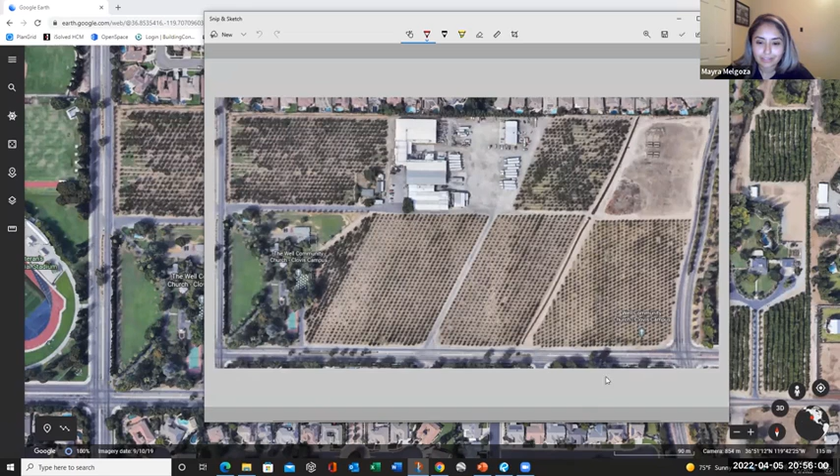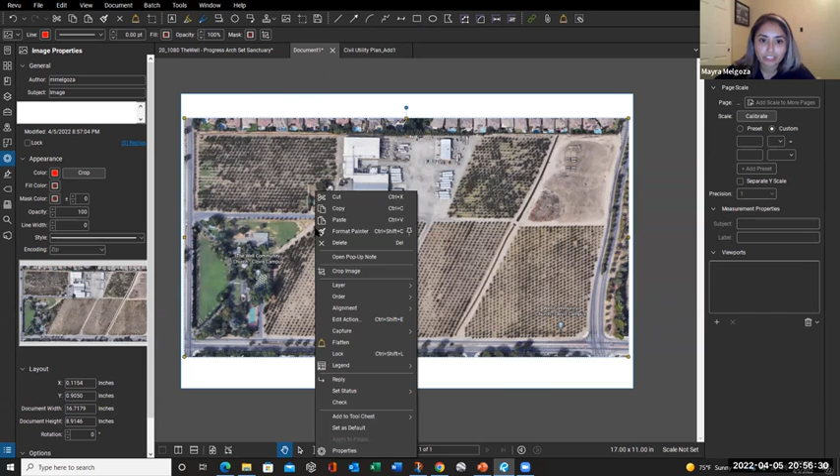And you just copy this. You go into your Bluebeam, start a blank document, and paste your image in here. It's going to come out pretty big, so you want to get it sized into that drawing or file. The key thing here is to make sure that as you're dropping these in, you flatten as you go, because otherwise stuff will just start moving on you. So you right click the image and click this flatten option, that way you can't move it anywhere.

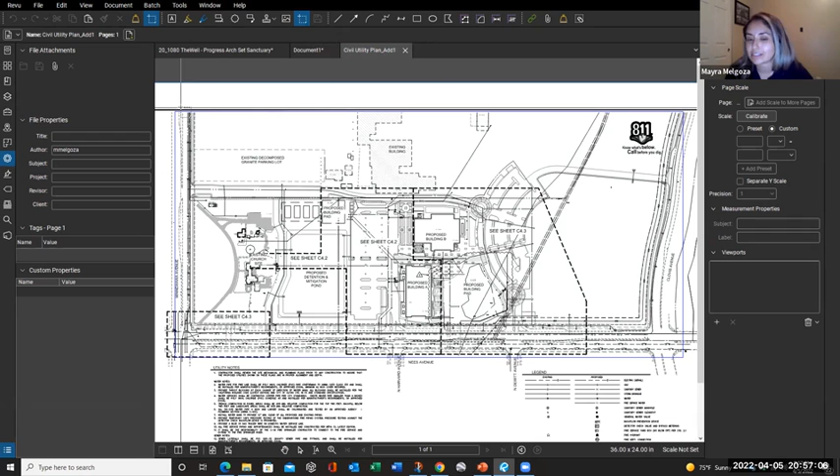So you go over here to your site plan and do that same snapshot feature on Bluebeam, and you grab those reference points too, the intersections, the existing buildings, and the streets. This is where, when the documents aren't at scale, for instance, this isn't going to line up perfectly when I drop this on here. This is where you play with your scale features.

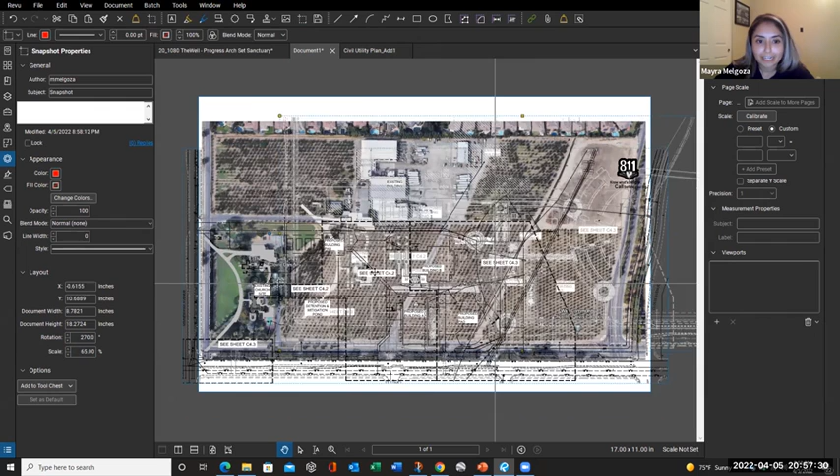And I'll start bringing all the images down, and the goal, as you can see, I kind of made it to... let me try to do this way. That was way too big. This is where the art comes in, you're kind of playing with your scale a little bit and trying to match up your existing buildings.

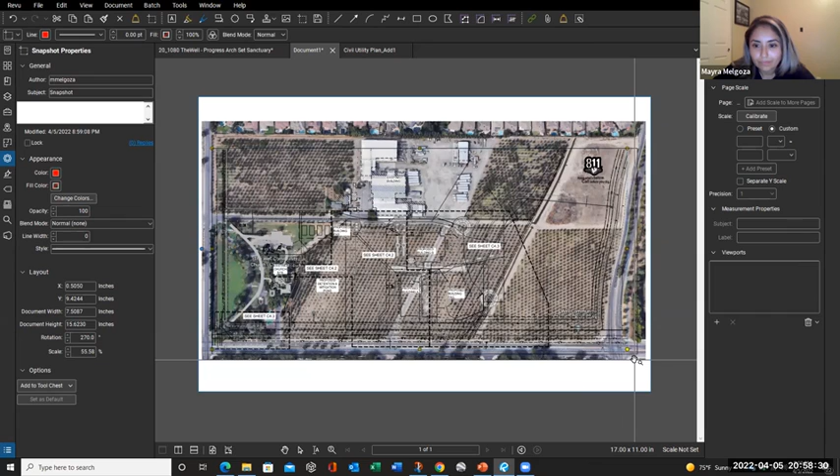You kind of get the buildings lined up as close as you can. You can play with it more depending on how precise you want it to get. And you start playing with these different blend modes to see where your image would look best. All of these change, but normally normal or multiply would be the best.

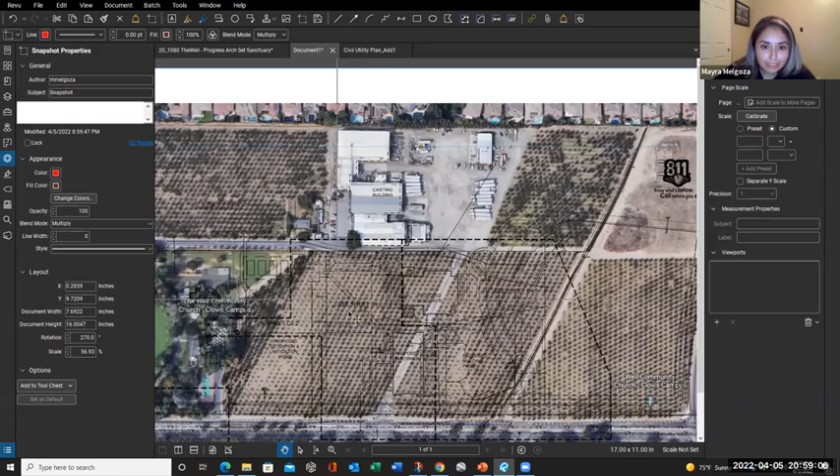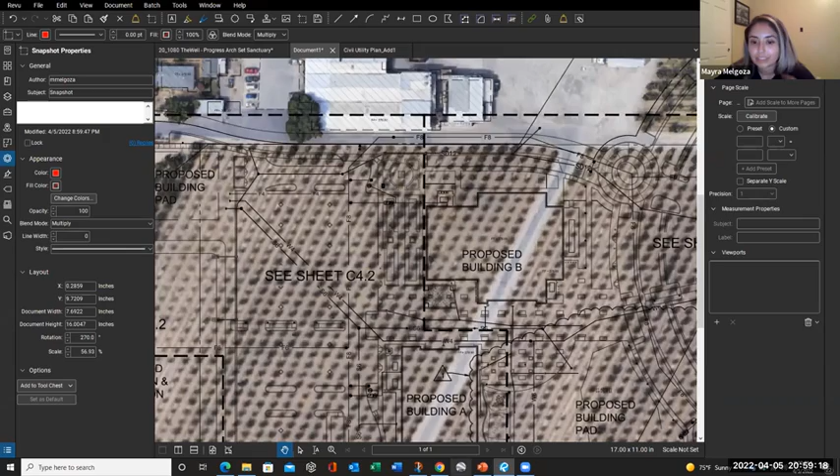This probably wasn't the best site plan to get, but you can kind of see once you zoom in where all your utilities will start running, where your proposed building is going to sit on top of the existing road. But more or less, those are the tricks to getting a plan sheet on top of a Google image.

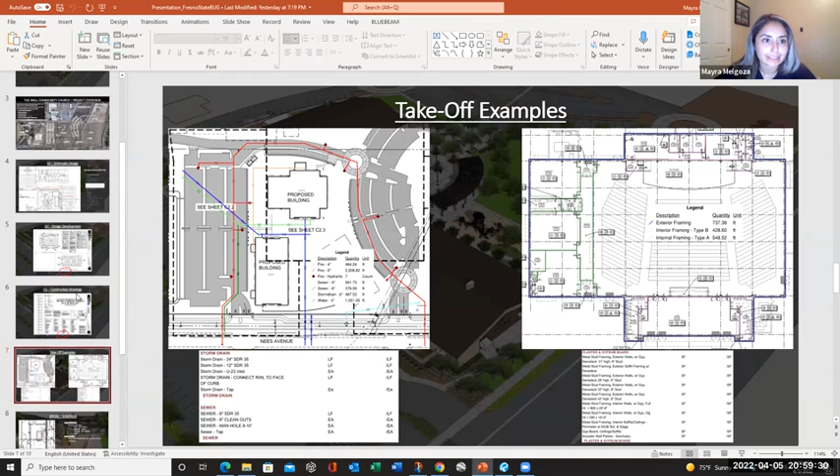If we go back to the sky, this one showed the paving, which is why it was a better plan to use instead of the utilities, because the paving was grayed out like this. So on this one, you can see right here it's not perfectly lined up, but this building got lined up pretty well, this intersection got lined up pretty well, and you start kind of playing with it.

But this helps the owner, especially because when you're in pre-con and talking to the owner, they can't see the correlation between what's existing out there in the field, which is just a large peach orchard with the road down the middle, as opposed to what the civil engineer and architect are drawing. They can't see that connection. So these overlays really help bring that visual aspect to the owners.

Next time they go out to the job site, they could be like, on this corner is where the volleyball courts are actually going to sit, the road in correlation to that building is going to be here. And then they'll walk the middle of the existing road, like, oh, we're standing more or less on where the buildings are going to eventually sit during the pre-con and design stage.

Thanks, Mayra. Any more questions? I hope that was helpful on the image. Yes, it was. And when in doubt, if you go into Google and grab any image, or if you have any photo, just right click, copy, and then you can drop anything into Bluebeam after you paste it.

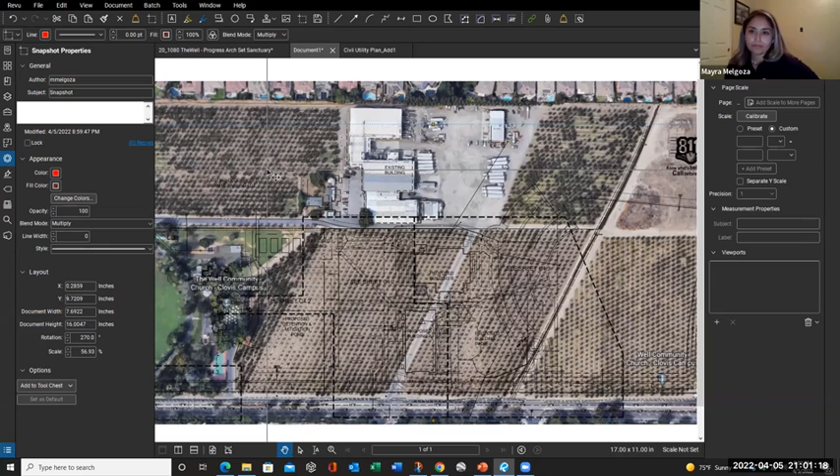So what do you think, Carrie? I think we should have Mayra come back again at some point. You gave us lots of tips to help us with our Bluebeam here, Mayra. It was very interesting learning about your project as well. There were a couple of questions, I'm going to read them real quick. Alexander Shelley asked, are you also in charge of building and contracting the internal roads of the property? And Carrie said, yes, we are usually contracted to the entire set of drawings that we receive to bid, unless the owner of the project has only desired us to bid a certain portion of the project.

He then asked, does this project also include widening to 2 lanes from Clovis to Minnewawa? No. We have everything from our property line into the property. Everything outside of the property line is the City of Clovis project, and they are actually going to widen Nees Avenue. It's part of their Measure C funding for improvements. But since it's public works and Measure C money, it has to go out to public bid. So it's not part of our contract, and it's not the owner's responsibility to widen Minnewawa. It was part of the conditions of approval.

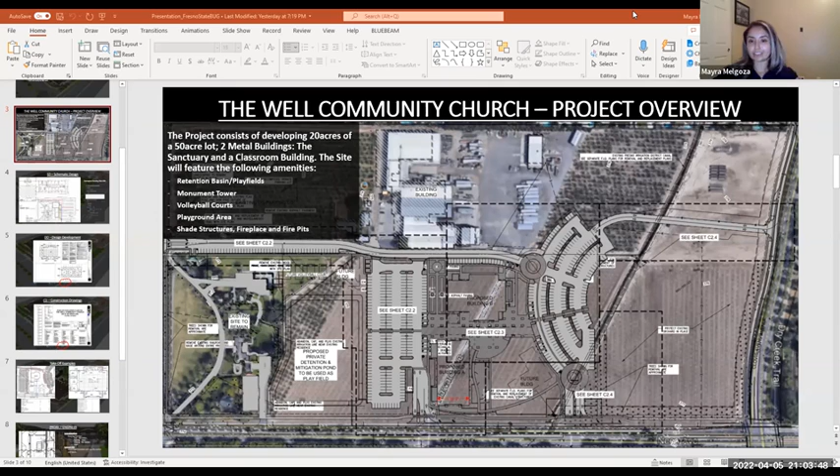I'm going to share my screen real quick. So, part of that widening is Clovis Avenue. We do have some street work, but not necessarily tied to large infrastructure for city improvements. But in order for us to be granted permission to build this project on the site, the city has conditions of approval, as they call them. One of them was to widen Clovis Avenue in order to allow us to have an entrance coming in this way. So that's part of our work, creating 2 lanes here, or an additional lane, since one already exists. Yeah, so you're probably putting in a turn lane into your site.

Mayra, when are you supposed to finish this job? It's supposed to be finished in mid-February, with the goal to get the client into the sanctuary for Easter service next year. So maybe we can get her to come back when she's done more of the construction, and we can see part 2, with more progress photos.